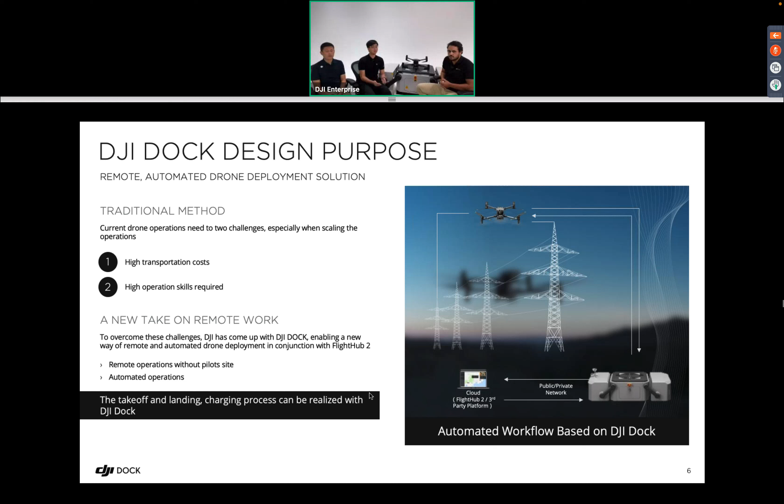Next is about the reliability, because DJI dock is deployed outdoors and sometimes in a very harsh environment, such as a mining site or a snow field. So DJI docks are built to withstand the harsh environment.

For example, firstly about the operation temperature range, DJI dock has a very wide range. It can work from -35 to 50 Celsius degrees. It also has very good weatherproof capability, with overall protection of IP55.

For lightning protection, it has a built-in surge protector that can prevent up to 40 kA of induction lightning. It also has a built-in backup battery, so even if the power source is shut down, the backup battery can guarantee 5 hours and ensure the drone can return to the dock safely. So this is about the reliability.

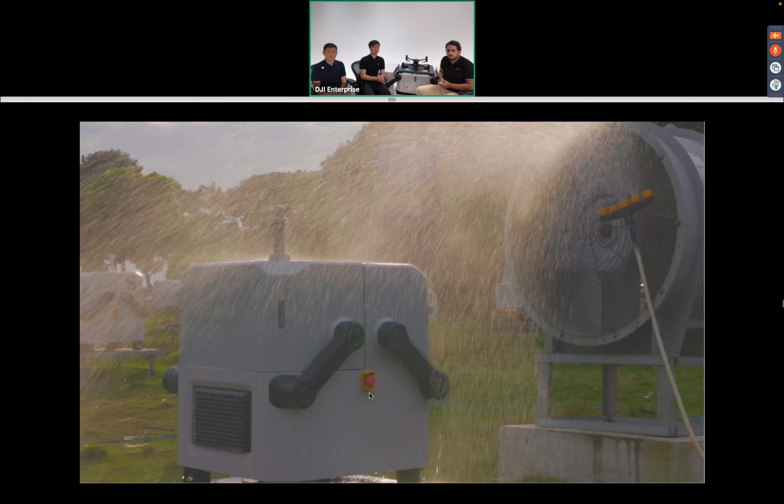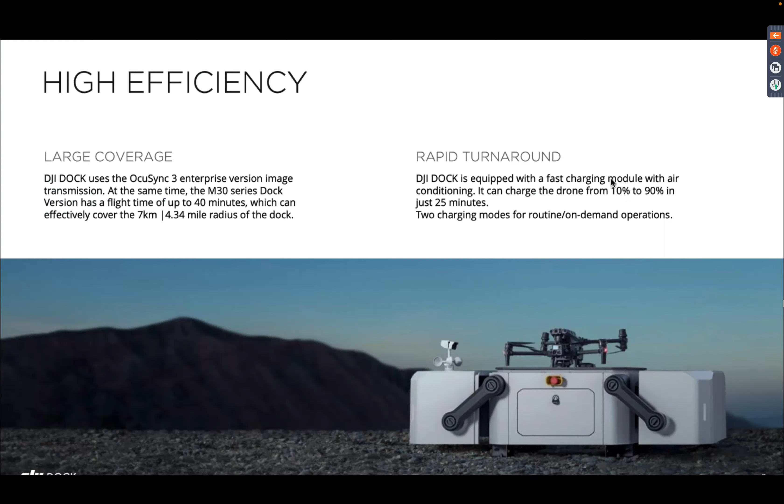Hello, I just want to make sure everyone can hear me. We had a network problem here at our site, so I want to confirm you can hear me. I apologize for the inconvenience, we had a network problem here, so we're going to continue.

Yes, continue please Bill, talking about the efficiency and reliability of the DJI dock.

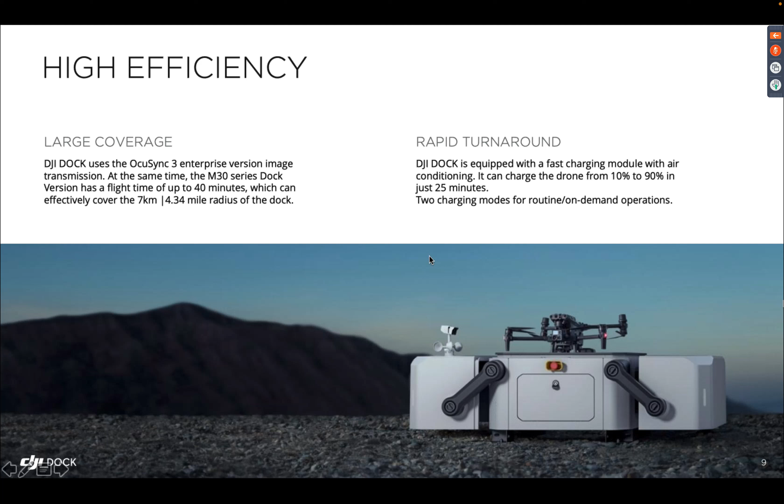When we're talking about efficiency, at first we need to talk about coverage. DJI dock uses the M30 dock version, equipped with a hybrid sensor. It has a laser rangefinder that can detect the range between the target and the drone, and also a thermal camera, a very good zoom camera, and a wide camera. This drone uses the O3 enterprise version image transmission protocol developed by DJI, which has very good anti-interference capability. At the same time, the M30 dock version has a flight time up to 40 minutes, which can effectively cover a 7-kilometer radius from the dock.

According to our experience in China, some public security users purchase DJI dock for emergency response and deploy it in cities with a population of 3 million. Only less than 10 docks are enough to cover the whole urban area for a city with 3 million population. When we talk about turnaround time, the DJI dock is equipped with a fast charging module, which can charge the battery from 10% to 90% in just 25 minutes, guaranteeing efficiency.

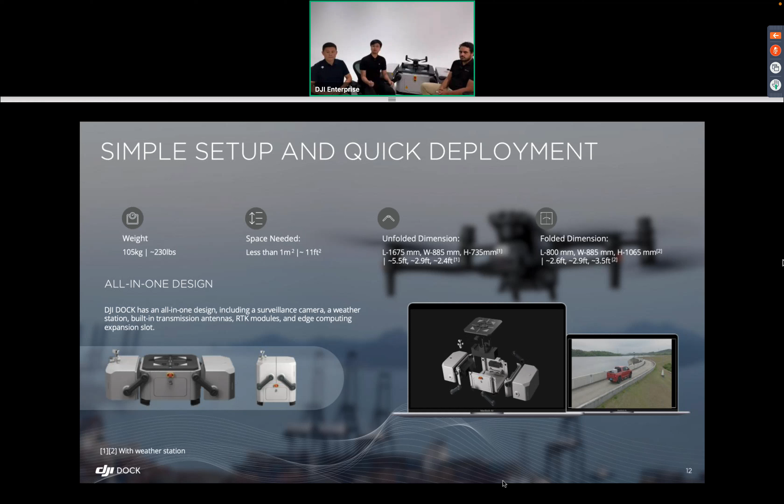You just need to deploy the DJI dock and do not need to deploy additional components like the antenna or RTK station. For the deployment process, it has 4 steps.

The first step is to do the site survey, kind of like deploying an air conditioner. The site survey means you need to guarantee the site used to deploy the DJI dock has a stabilized power source. Because the DJI dock's maximum power consumption is 1,500W, you need to guarantee the power source can meet the requirement of the DJI dock.

Next is about the network, the Ethernet. The network requirement of the DJI dock is both uplink and downlink bandwidth greater than 10 megabits per second. Also for the image transmission, you need to avoid signal obstruction.

After you finish the site survey, you also need to do a little bit of civil work. For example, you need to make a base, like a concrete base or metal base. The base is used to raise the DJI dock, to prevent flooding, and to stabilize the dock. Besides the base, you also need to prepare cables, the power cable and the Ethernet cable, and use PVC pipe to cover the cable.

Sometimes the cable needs to be buried, and sometimes grounding is required. If you already have an existing grounding system, you need to connect the DJI dock to it, or build an additional grounding system for the DJI dock.

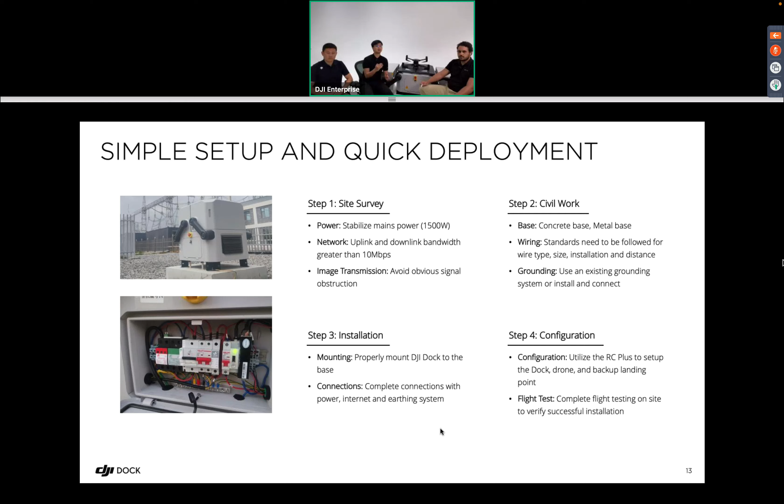After you finish the deployment and installation, the next step is using the DJI dock - how to manage it. DJI provides an intelligent management platform, FlightHub 2, which is a web-based dock management platform. It is a public cloud server based solution, with the server located in Virginia, United States, operated by AWS, Amazon Web Service.

In this cloud platform, users can do everything related to the DJI dock, whether automatic flight, remote manual flight, data management, or dock maintenance. I will introduce them one by one, firstly about the automatic flight.

If a user wants to use automatic flight to let the dock execute an automatic mission, firstly the user needs to plan the mission. DJI provides 3 methods for route planning.

The first one is 2D planning, the traditional way of planning the route on a 2D map. The second way is live mission recording, where you plan the route on site and synchronize the mission to the cloud. The last way is immersive 3D flight, where you upload a 3D model and fly a virtual aircraft to plan the route.

Firstly, the 2D map planning is very simple. You can import a 2D map or use the satellite map, and define the overall mission settings like flight altitude, flight speed, altitude mode, etc. You can also add waypoints and waypoint actions at each waypoint, and adjust the gimbal orientation. This is in the FlightHub 2 interface, and you can also see the camera view to see what you can get.

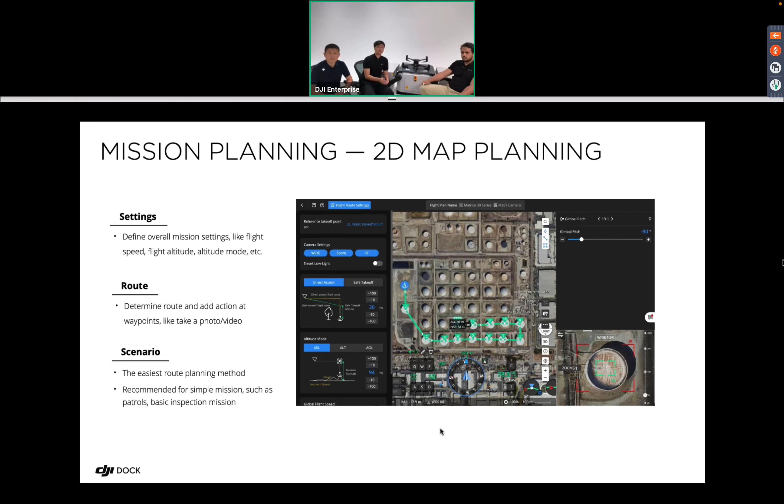This way means you need to use a remote control and record the mission on site. You need to manually fly it once, and the drone will record each operation, including the aircraft position, the gimbal's orientation, and the actions you use, for example taking a picture or video. After the drone records, it will save as a file, and you can synchronize the file to our cloud platform, FlightHub 2, and the dock can automatically use this file and execute it.

And this scenario is actually used for detailed inspection, because, for example, you need to inspect things like insulators in power grid inspection, or even the bolt, because it's more detailed than the first way.

And the last method is the immersive 3D fly. This is kind of like you need to upload a 3D model first, no matter the photogrammetry mode or point cloud mode. And next we provide the flight planning tools.

You can use the keyboard to fly the virtual aircraft and plan your route, to add a waypoint, to add a waypoint action. So actually this scenario means you don't need to go on site, because if you use the live mission recording, you need to go on site and manually fly once. But for this, you don't need to. You just need to import the 3D model and fly the virtual aircraft to plan. So it's also recommended for detailed inspection.

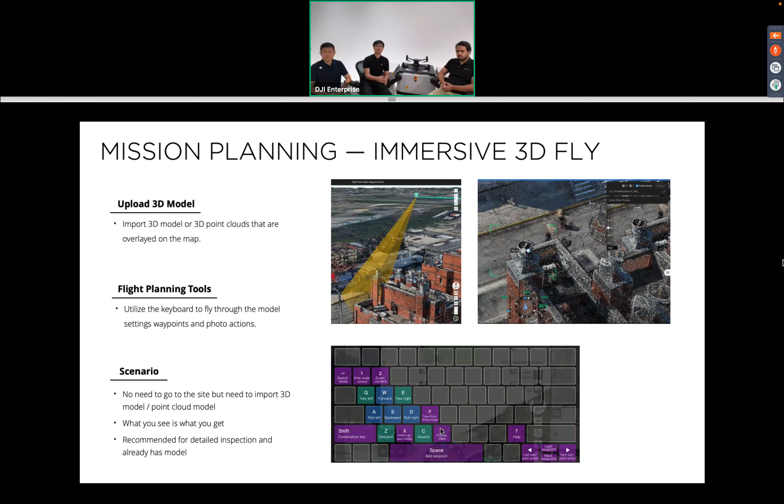You fly a virtual aircraft in the 3D model, and you can drag the screen to adjust the gimbal's orientation, and find the correct position and target, and you just need to add the waypoint.

So this is already happening in FlightHub, right? Yes, and actually this is a new feature we just released this year, because we continuously collect users' feedback. So they needed this feature, so we developed it.

And also you can see the preview on the right side. This is the preview. So this is what you get, this is what you see.

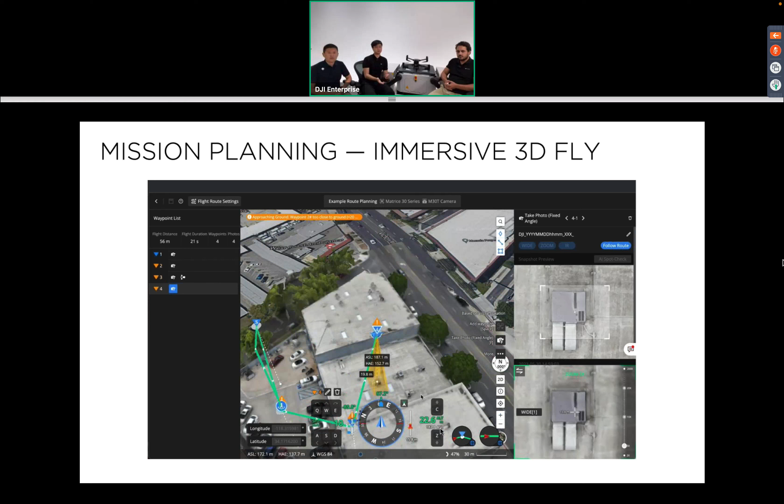All right. And after you plan the mission, the next step is to execute the mission. Actually, DJI provides multiple time plans for this. For example, you can schedule an immediate mission, or you can schedule a timed mission, for example every week, every day, or every month, for the automatic mission you can set. It's like scheduling a meeting in Outlook, very similar.

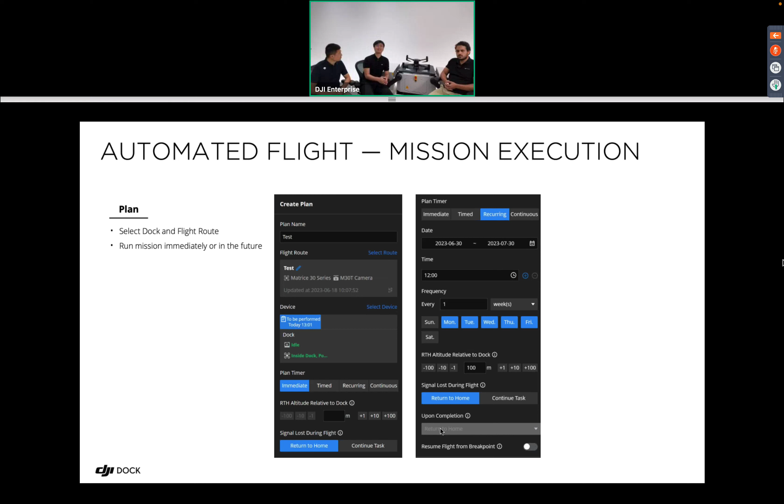And next, after you schedule the mission for execution, during the mission execution, you can use FlightHub 2 to monitor the progress. For example, this is a demonstration video, and you can see the live video feed from the drone, and also check the progress on the map.

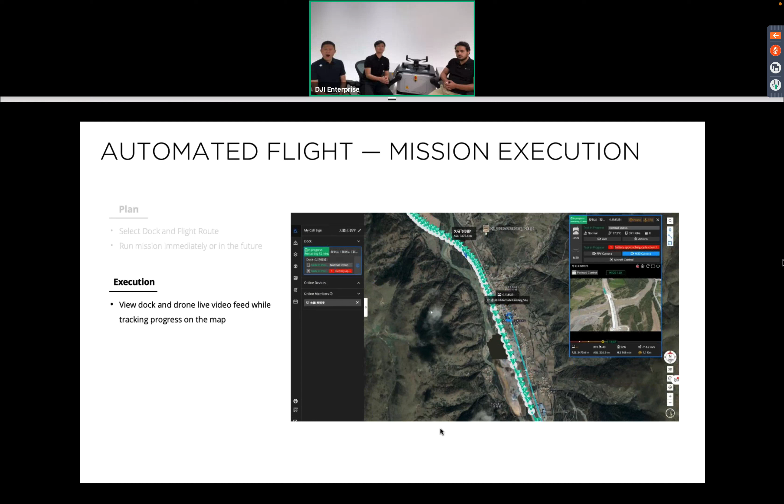Yeah, this is a demonstration video. You can watch the live feed and check the progress.

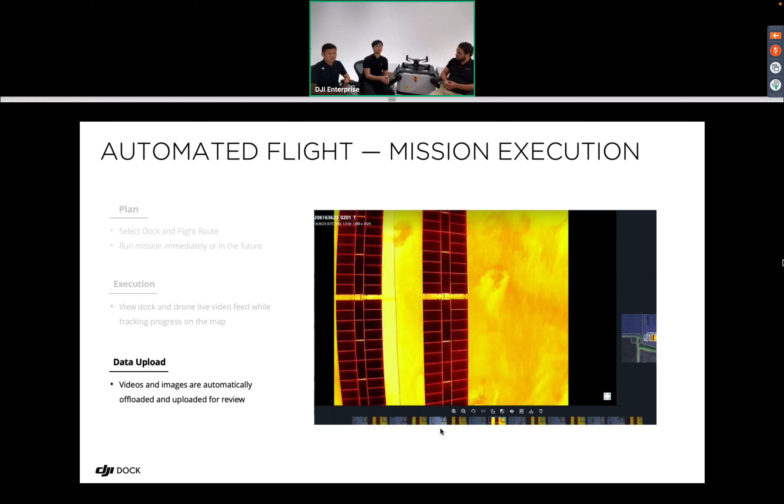And after the drone finishes the mission and returns to the dock, the media files on the SD card will automatically upload to FlightHub 2, and you can check them, view them, and analyze them there. So this is about the automatic mission workflow.

And the DJI Dock will also support live flight control, or remote manual flight control. So this is a demonstration video. You can use the keyboard to control the drone in FlightHub 2. For example, use WASD to move the aircraft forward, backward, left, or right, and use Q and E to rotate the drone, and C and Z to raise and lower it.

And this is actually now using W to move the drone forward. Okay, and also, hold on one second, sorry.

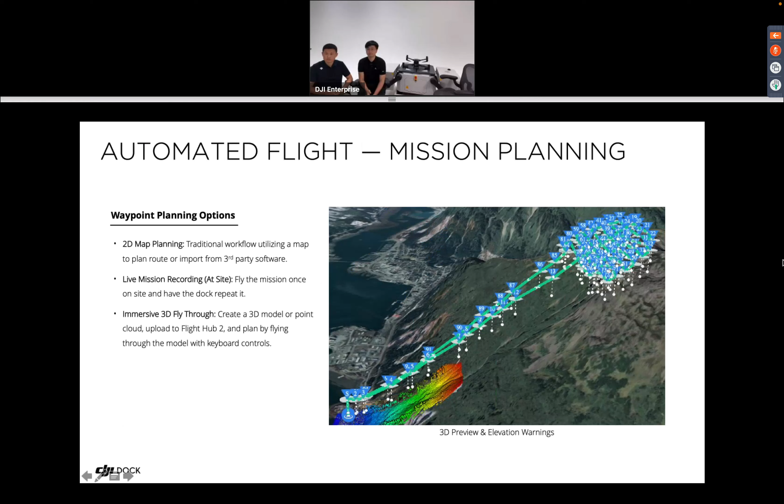Okay, actually, for this function, it's like playing a video game, using the keyboard to control the aircraft from the laptop, and also for gimbal orientation, you can double-click the screen to adjust the gimbal orientation.

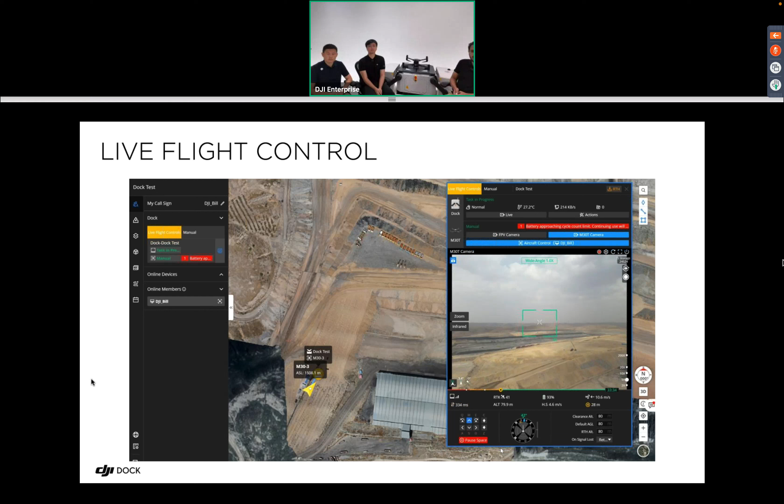Okay, and next we also provide another feature called Fly To, which means you can right-click the map and set a Fly To location, a Fly To destination, and then click Start. The drone will automatically fly to the Fly To location. And here is a demonstration video of right-clicking the map to set the Fly To location.

And it's very useful for emergency response. When you get the location, when you get the coordinate, you set the destination point, yeah.

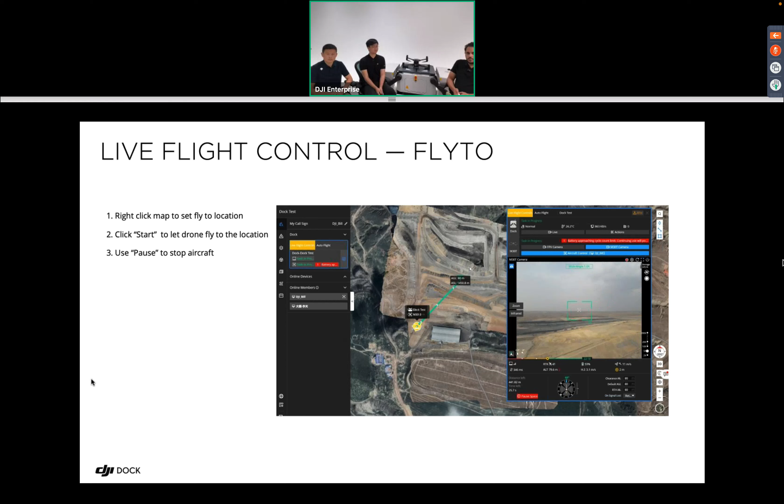And actually, another function included in DJI FlightHub 2 is remote data management. Actually, it includes two parts. Firstly, it supports model importing. This feature is also released this year because, when you do route editing, if you can import a 2D or 3D model, it's very helpful for route planning.

And also, it supports media file management, so users can view and download media files in FlightHub 2. And also, it can check the location where you shot the photo and where the target is, because the drone is equipped with a laser rangefinder, which can be used to calculate the coordinate of the target.

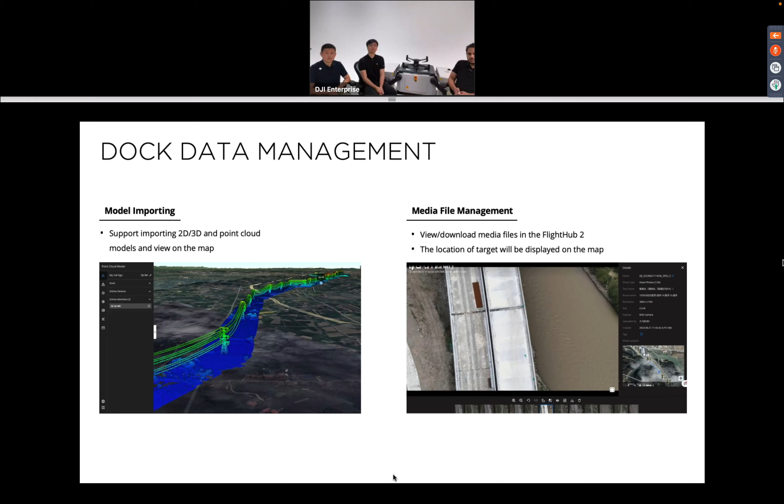Okay, and this is about the data management, and also for the remote dock management. Sometimes DJI dock is deployed very far from city, and we do not want the engineer to frequently go on site to do maintenance. So we improved our hardware, we improved our reliability, and according to our laboratory test, the maintenance interval is 6 months. You don't need to frequently go on site for maintenance. And for the software part, in FlightHub 2, we also provide many functions that let the engineer do some simple maintenance work.

For example, the first one is the remote update. DJI style is we will frequently update our firmware because we continue to collect user feedback and user demand, so we develop new features to meet the demand. Averagely, each quarter we will have a big update introducing more features and functions. This allows users to update the dock and aircraft remotely in FlightHub 2, not on site.

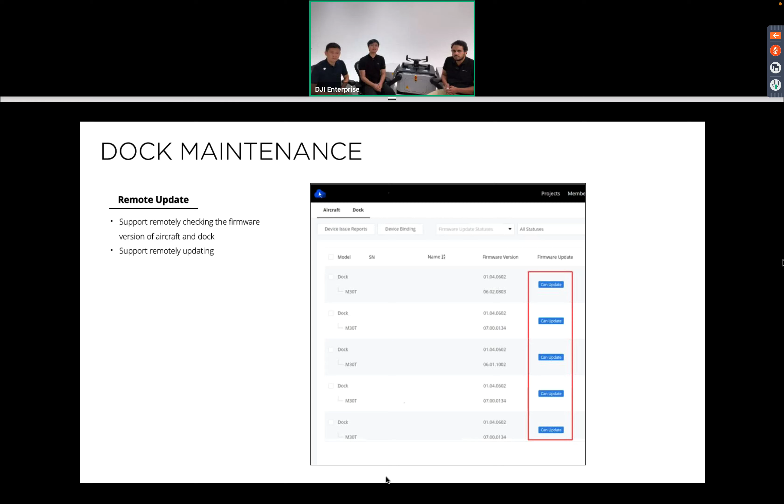Next is about remote debug. DJI dock is reliable, but sometimes it will also have some small issues, and most of the issues can be simply solved by restarting the aircraft or restarting the box, which you can do remotely. So this exactly does that.

And next is about the warning message. When the DJI dock encounters some issues, it will have warning messages, and you can see the history. DJI dock and FlightHub 2 will give you corresponding solutions for how to address this issue, and it's helpful for the engineer to solve the problem.

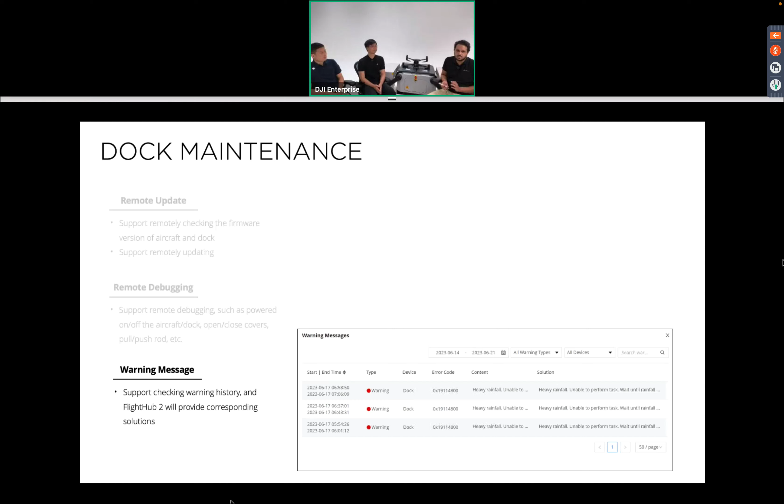Very interesting. I'm looking forward to seeing which of these features, from data management to dock maintenance to live flight control, users are more interested in testing. So let's launch our third poll of this session. The question is, which features are you more interested in testing? Let's launch the poll now.

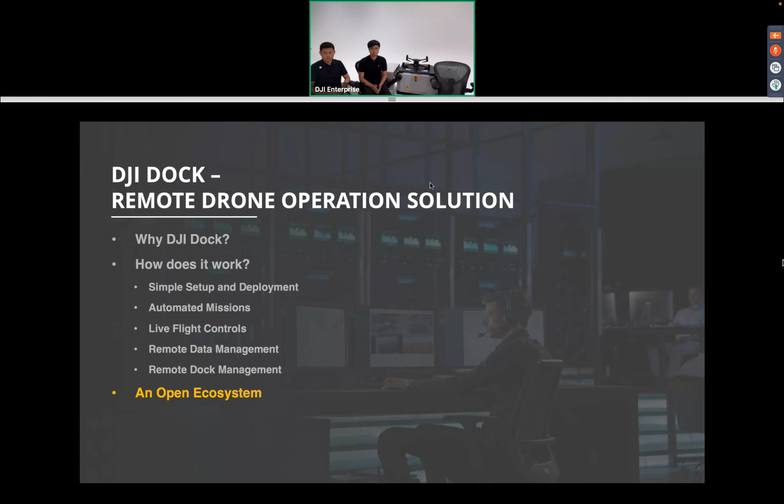Yes, so DJI provides some extensibility for DJI Dock that allows third parties to integrate solutions with the DJI Dock. Firstly, for the third-party solution, DJI provides the cloud API. It's kind of like a software development kit for third-party development, and they can develop more customized functions.

For example, AI algorithm - using AI algorithm to do facial recognition or defect recognition. And also, because now FlightHub 2 is based on the public cloud, some users may want to deploy the DJI Dock on premise, in the on-premise network. So it also relies on the third-party developer to provide a solution.

And up to now, DJI has already cooperated with many developers, like FlytBase, which is based in the US, and Tianyi, a Chinese company that can provide a 5G solution for DJI Dock, and also Drone Harmony and AirHub, which are based in Europe. We have already finished the demonstration and the test, and they are ready to meet the diverse, more customized requirements from users.

All right, so if any user has a specific need, like for example private deployment, they can reach out to some of these companies to see what they can offer. All right, that's very good.

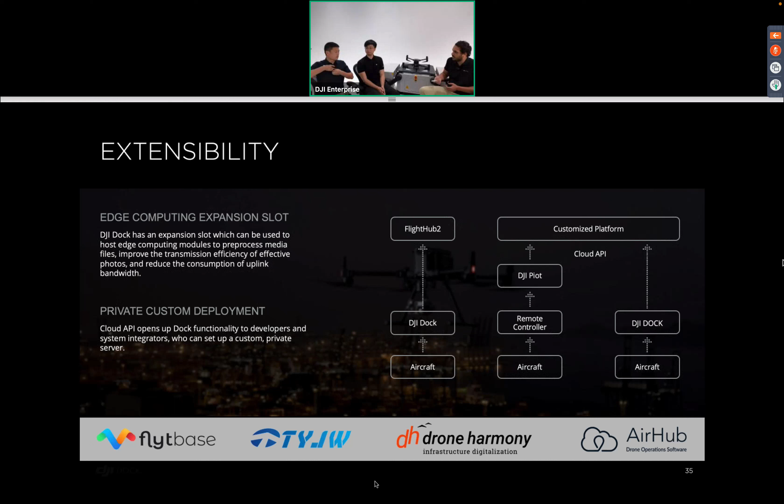So we have talked a lot about the capabilities and what the dock can do, but now let's talk about applications and use cases. And for that, I'm going to move to Luke. So Luke, you have been in the energy industry for many years, and we know that energy companies have been one of the early adopters of the DJI Dock. So what can you tell us about the dock applications and use cases of the DJI Dock here in China?

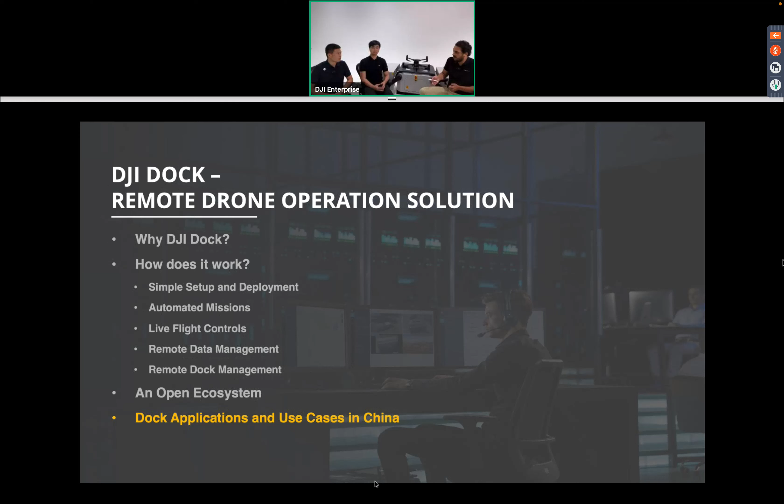Okay, hi ladies and gentlemen, I'm Luke. I'm excited to be here today to share with you some of the exciting applications of DJI Dock in the energy industry, including power, oil and gas, and renewable energy. As a BD manager in the oil and gas industry, I have witnessed firsthand the great potential of DJI Dock in the field. In recent years, the Chinese government has been actively promoting the development and application of DJI Dock and drones in various industries, including energy. The government has set out a clear road path and goals to encourage different companies to use drones and AI technologies to optimize their current workflow.

So our first use case is from the power industry. Drones are already commonly used for power line inspection and maintenance. With the help of high resolution cameras and sensors, drones can quickly and accurately detect potential problems and other hazards, which greatly reduces the risk of power outages and improves the efficiency of maintenance operations.

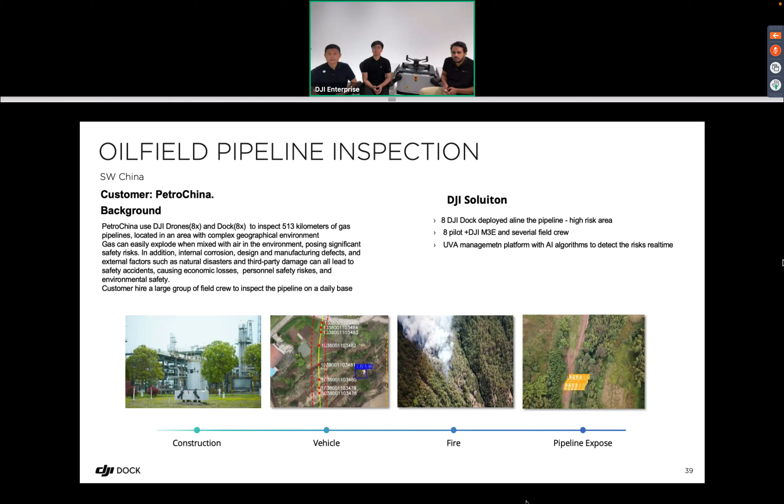So with the DJI dock solution and AI detection technology, we helped the customer cover the inspection of the pipeline to reach 100%. We also reduced manpower by 60%, and inspection efficiency improved 10 times.

We received very positive feedback from the customer, so in the future they will gradually use DJI dock with AI detection to upgrade their current workflow. Yes, so they are combining the dock plus other manually flown pilots.

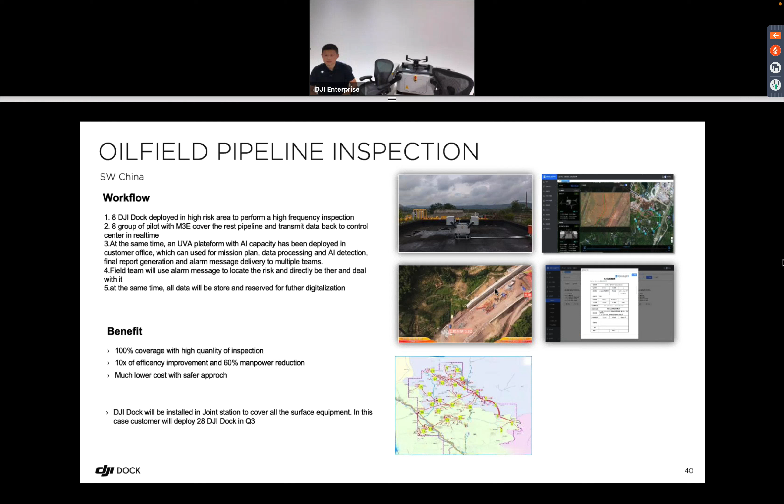Right. Let me check. 2. Can you hear us? Apologies, some technical issues here. Sorry, we apologize for the technical issues. Our computers are having a little problems here, but we're gonna resume. So, 1 second. Sharing my screen. No. All right. Okay.